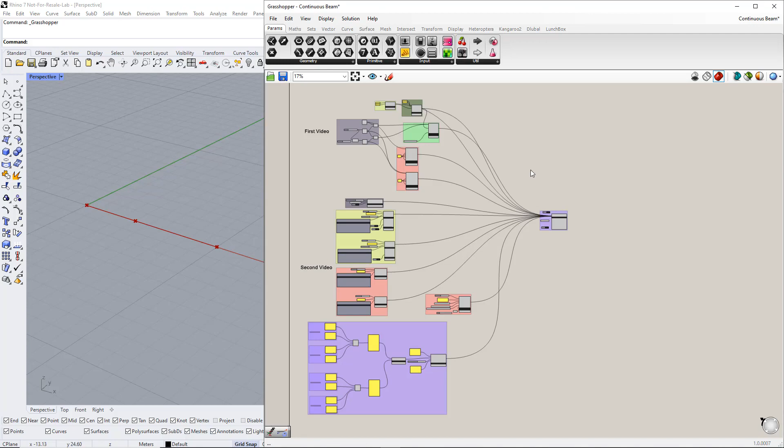Our first example will be about a continuous beam, and it will be divided into 2 videos. In the first video, we will create the geometry, members, cross-section and material, and assign supports. In the second video, we will create static analysis settings, load cases, design situations, and load combinations. Afterwards, we will apply the load on the members.

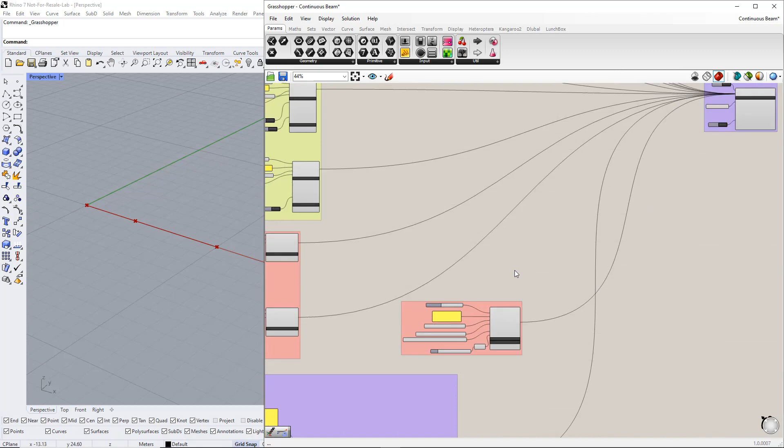In order to follow our online course, you need to install the Dlubal plugin for Rhino and Grasshopper. You can find it in the Dlubal folder under Tools. Double-click on the file to run the installation. After completion of the process, start Rhino Grasshopper and RFEM.

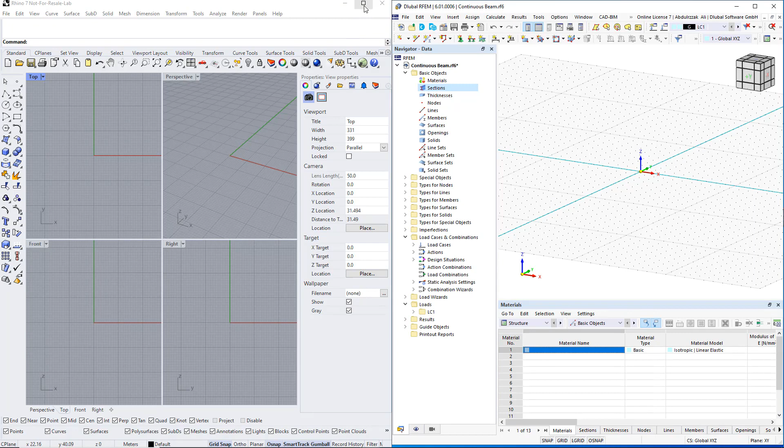First, we will show you some information about Rhino Grasshopper. When we start Rhino, we have 4 default viewports: top, front, right, and perspective view. To rotate the perspective view, hold down the right mouse button. You can zoom in or out by scrolling. You can pan by holding down the mouse wheel.

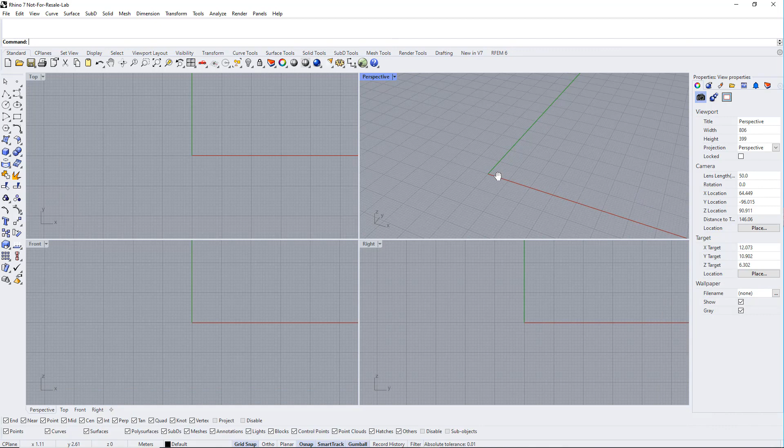For other views, you can pan by holding down the right mouse button. To minimize or maximize a viewport, you can double-click on the Name tab. You can also change the viewport from the Viewport tab here. You can change the display mode of a viewport as well as many other settings by clicking the Name tab, as you can see.

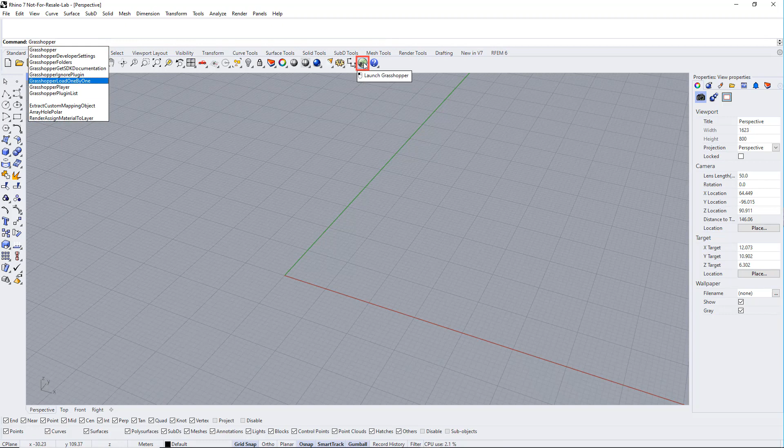To launch Grasshopper, type Grasshopper into the Rhino command line or use the command Launch Grasshopper in the Standard tab in Rhino. The Grasshopper window will appear on the Rhino viewports. You can divide the screen into 2 parts by holding the Windows key and pressing the left or right arrow key. We will display more information and features during the course.

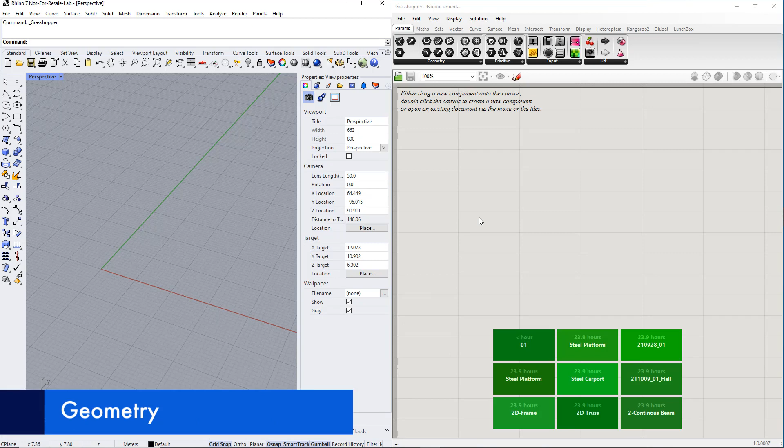Now, we will begin with the geometry. First, we will create a point using the Construct Point component. You can find this component in the Vector tab. Then drag and drop it from the Vector tab onto the canvas. You can also create a construct point by double-clicking the canvas and writing Construct Point.

By default, the coordinates of the first point are 0, 0, 0. You can read any information in a component using the command panel, which can be found in the Params tab, as you can see. Afterwards, we will copy it twice using Ctrl+C and Ctrl+V or by holding the Alt key and dragging the component.

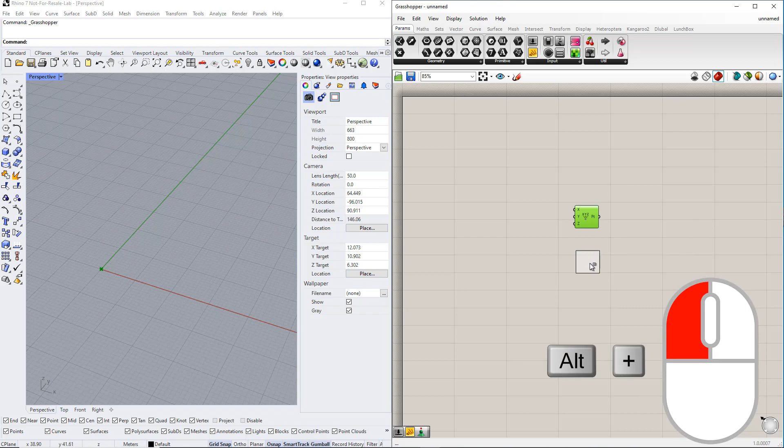For the second point, we will assign a number slider to the x-coordinate, so that it can be easily adjusted later with the slider. You can find it in the Params tab using drag and drop or by double-clicking the canvas and writing number slider, as you can see. For example, we will create a range by double-clicking the slider. The lower limit is 1 and the upper limit is 10. You can also enter the slider name. To do this, we enter first span, or set the rounding by selecting any type you want.

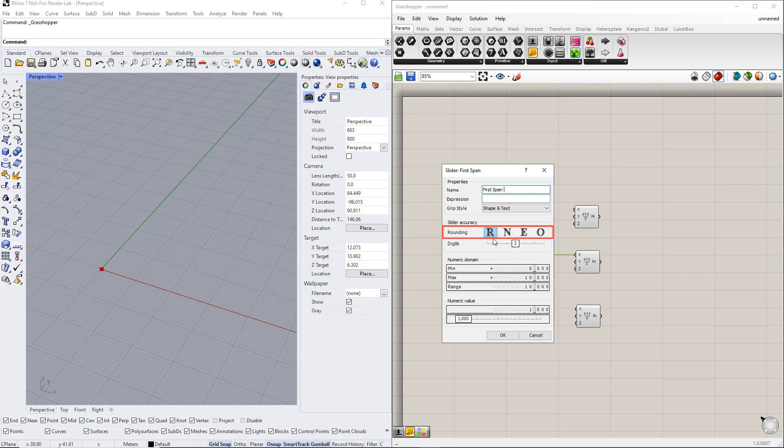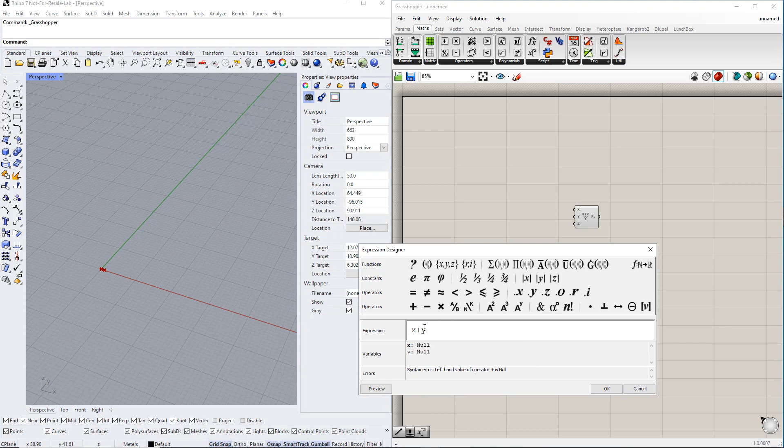For the third point, we will insert the expression component to define a parametric equation between the first and second spans. You can find this component in the Maths tab under Script. Double-click the expression component to open the expression designer and change the expression to x plus y, where x is the first span length and y is the second span length.

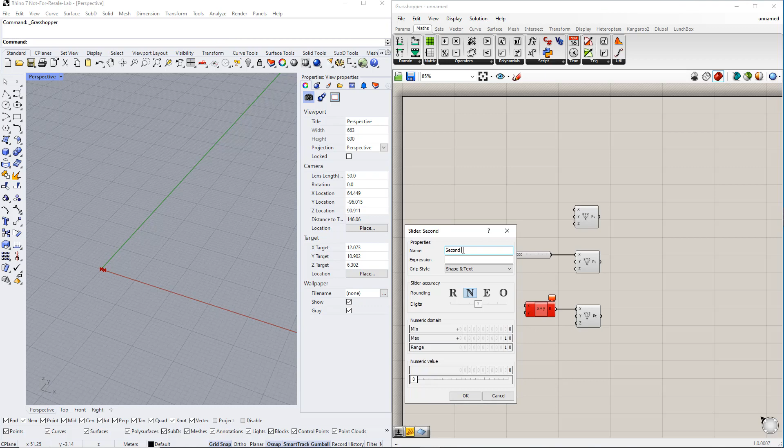You can create a range for y, either with a number slider command or by double-clicking the canvas and writing the lower limit, 0, then, less than, and the upper limit. We enter 10 for the upper limit. You can click the plus sign to add an input or the minus sign to remove an input. Now, we connect x and y to the expression component.

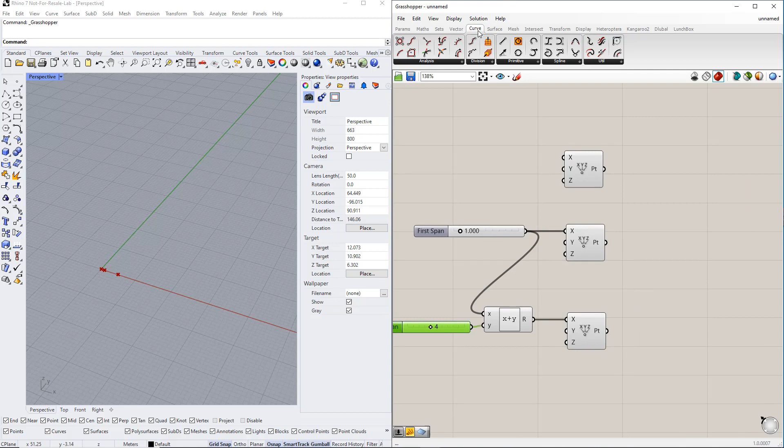In the next step, we will create lines between these points using the line component in the Curve tab. We use drag and drop, or we double-click on the canvas, write line, and select the respective line. In our example, we select the line, which has a start and an end, as you can see. Afterwards, we connect the start and end points of each line to the line component.

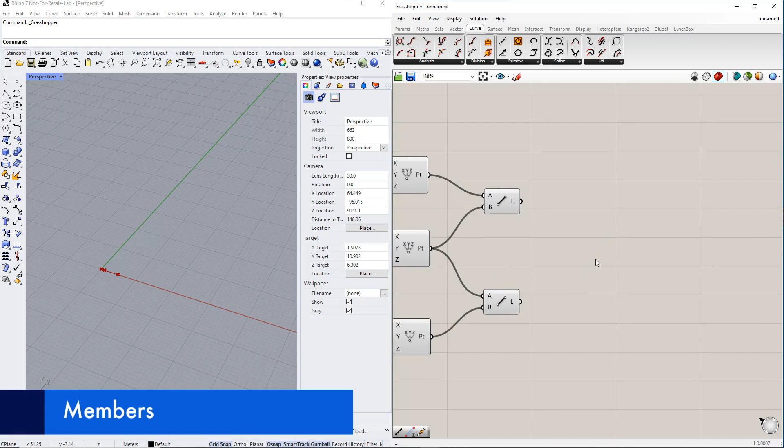To create a member for RFEM, we insert the Dlubal component titled Member. You can find it in the Dlubal tab. Here, we can also define the member type using the value list command with drag and drop, which is also in the Params tab. We can also double-click the canvas and write value list. For this example, we select the beam type.

Now, we connect the line components to the Grasshopper line in the member component. By default, a new connection will erase existing connections. Hold down the Shift key while dragging the connection wires to define multiple sources. The cursor will turn green to indicate the addition behavior. You can disconnect wires by holding down Ctrl and dragging, or by right-clicking the connection and selecting Disconnect. As you can see, when we hover over an item, the wire will be highlighted in red.

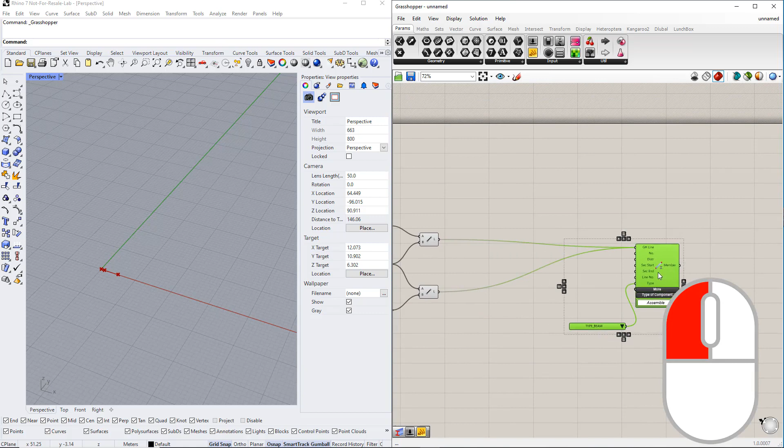Next, we will define a cross-section as well as material. For that, we will insert the Dlubal components, section and material. You can also find them in the Dlubal tab. To enter the properties of the section and material, we use the panel command.

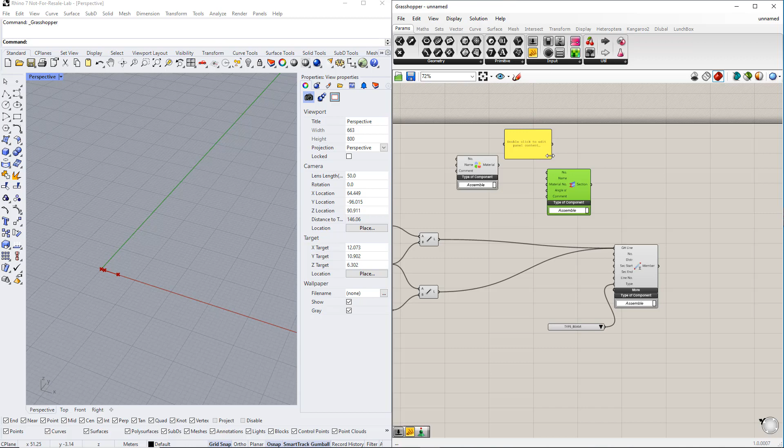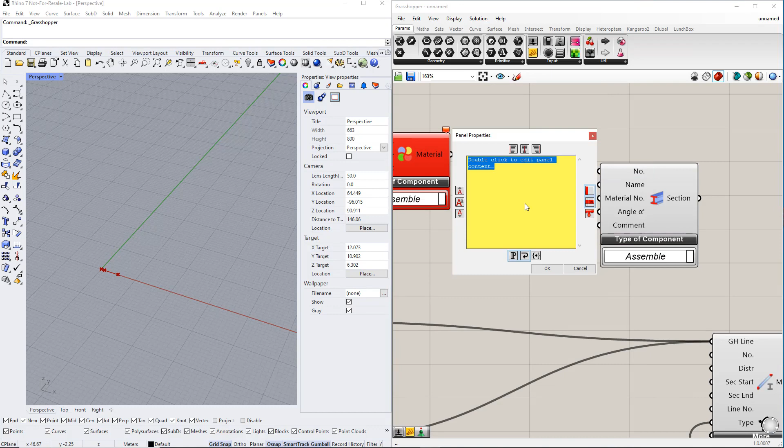Now we enter the numbers and names. For cross-section, we enter 1 as the section number and IPE 300 as the cross-section name. For material, we enter 1 as the material number and S235 as the material name. Make sure that you use the correct RFEM terminology. Only then is it possible to export the elements correctly to RFEM.

Afterwards, we connect the material component to the material number in the section component and connect the section component to the section start in the member component.

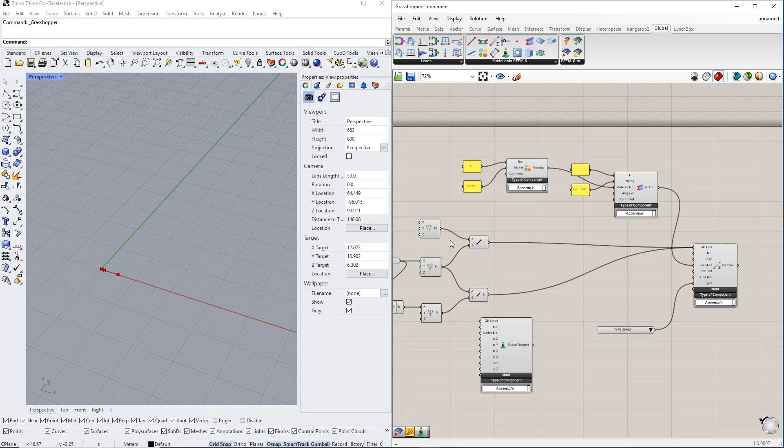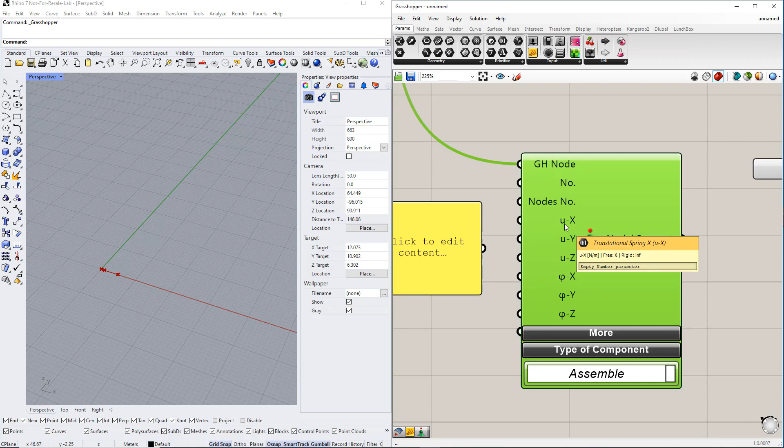In the next step, we want to define the supports. To do this, we insert the nodal support component, which is in the Dlubal tab. For the first node, we want to assign a hinge support. This can be defined by using the panel command. As you can see, 0 means free, infinity, INF, means rigid, and every specific number in between means spring. Then, we connect this panel to the respective support conditions.

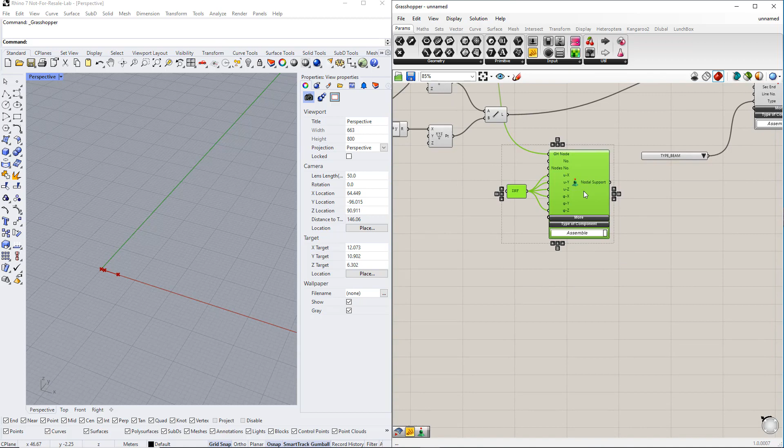We repeat the same procedure for the second and third supports, but with other conditions, because we want to define sliding supports.

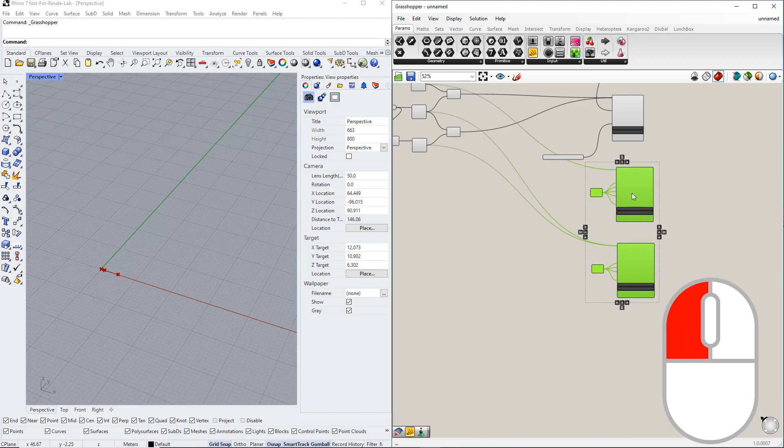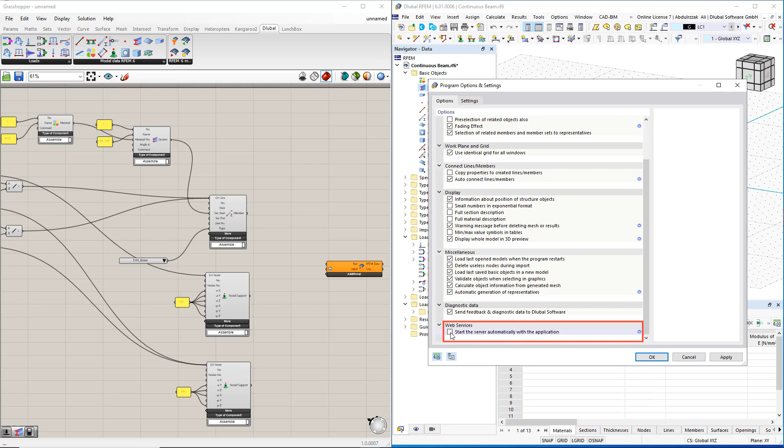To transfer this model data to RFEM, we have to insert the Dlubal component, RFEM 6 export component. We also have to activate Web Services, which is in the Options tab in RFEM 6. Start the server automatically with the application. To start the export, we use either the button or the Boolean toggle command in the Params tab. For this example, we want to use the Boolean toggle command.

We can also select units using the value list command. For this example, we select meters. In addition, we can overwrite the previous data in RFEM using the Boolean toggle command. That means all data in RFEM will be deleted before the export, once we switch to true.

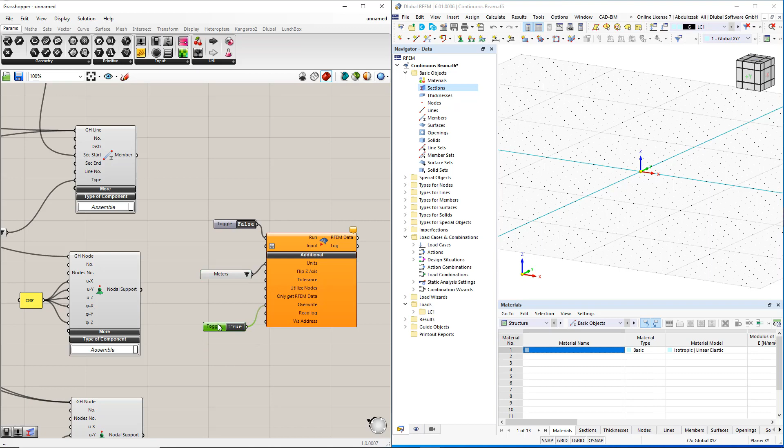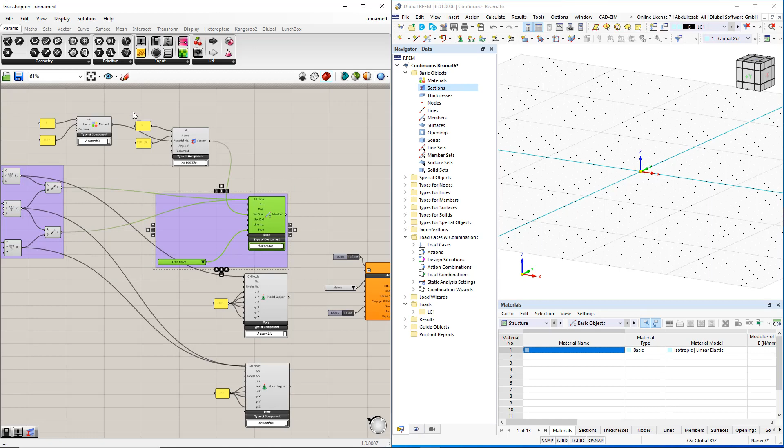To make the work easier, we will make groups, for example, a group for geometry, member, and so on. We can create a group by typing Ctrl+G with the desired component selected. To edit the name and appearance of the group, we right-click anywhere on the group. Here, we can enter the name of these groups, for example, geometry, supports, etc.

We can also change many options, such as outline type, add to group, remove from group, or change group color, as you can see.

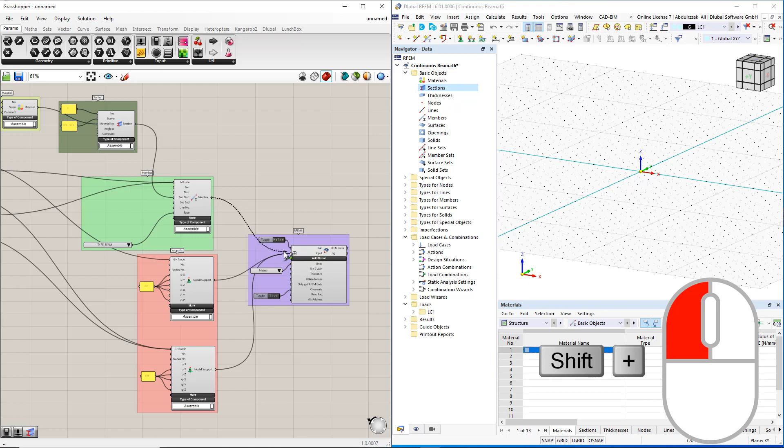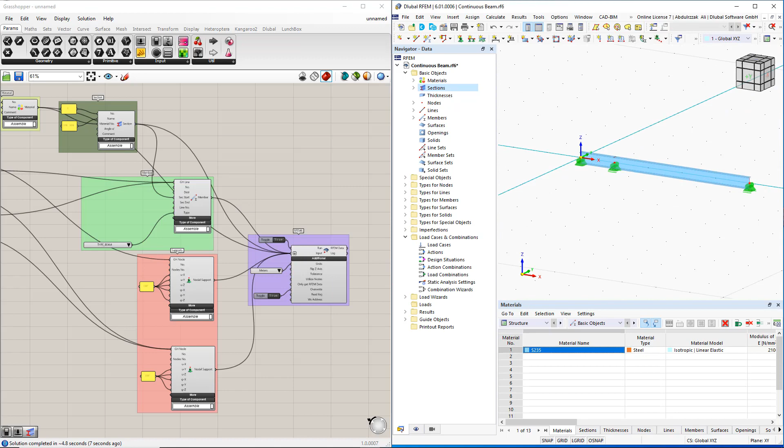After connecting all the components to the RFEM 6 component, we double-click the Boolean toggle command to perform the export. All changes to the parameters in Grasshopper now have a direct impact on the RFEM model.

In the next video, we will learn how to create static analysis settings, load cases, design situations, and load combinations, and apply the load on members.